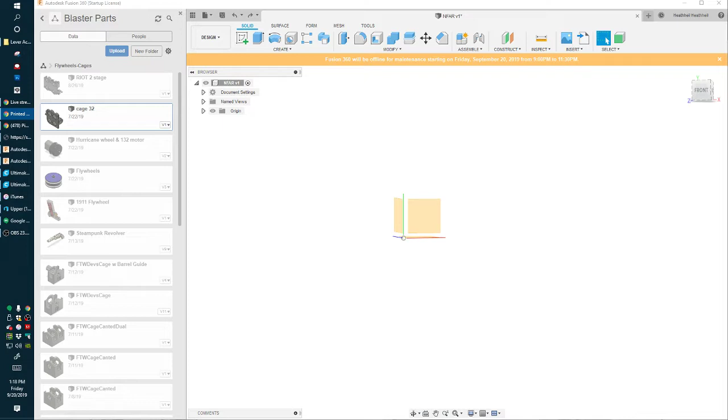So, I am going to make the no frills assault rifle, although it's going to have tons of frills by the time I'm done, probably. But I want to make something basic, simple.

Something kind of what Torukmakto calls it, the new dream rifle, and so I'm going to make one of those, but not like he would—I'm not nearly as good at that internal stuff.

Anyway, that's an intro. So welcome, Red Roy. Yeah, the people have the Sentinel if you can find one, but you can't—who can find a Sentinel? I sure can't, I haven't seen one. Actually, I have one, but it broke. I broke all of my Sentinels.

Anyway, so the start here. I'm hoping most people will watch this later because I'm just going to kind of treat it like I would treat one of my normal videos.

So the way that we start, and I'm using Fusion 360, some basic setup things—I've turned on the origin so we can line things up.

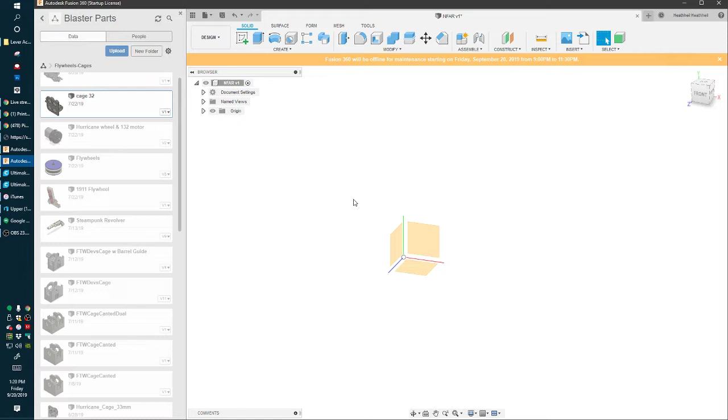I'll try to figure this out. Anybody who has questions, feel free to ask, I'll answer them as best as I can.

So there's some things that I set up. First, you have to save your thing, save everything into the same place so that you don't have to move them around to different projects. So all of mine are just a demo project because that's just where I started saving things.

And then, like I said, turn on the origin so you can see the center of everything. The first thing that I do, and you can actually change it in the settings, is I turn off the capture design history. I don't like doing that because, even though it gives you some really cool tools, it slows down my computer enough and it's made things complicated enough that I don't do that.

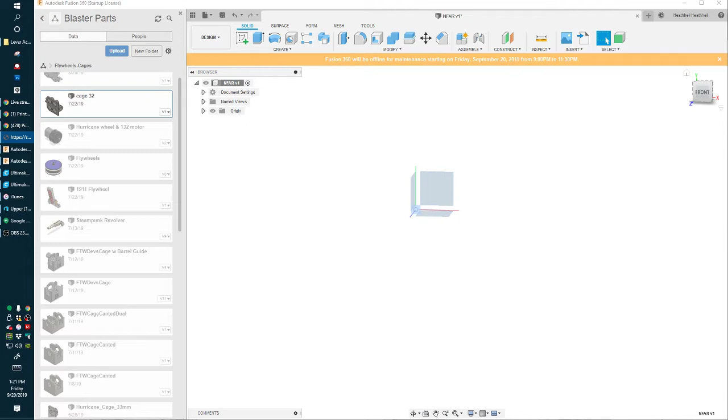Anyway, first thing that we do—I'm not exactly sure where other people are going to find these sorts of things, but that's just how it goes. There are open flywheel project cages that you can get in step format. I've got a nice collection of parts here.

Most of them are available in step form, I think, publicly. So what we're going to do is we're going to start by placing in our internals. I want something reasonably powerful, so I'm going to just build right away around a double hurricane cage, which will hit like 170 FPS.

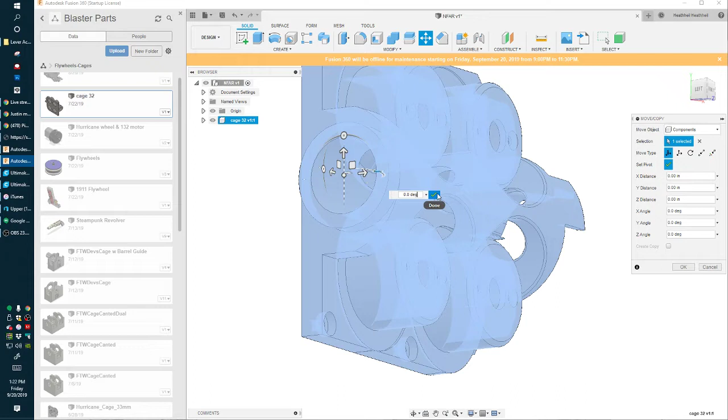The first thing that I'll do is we have the cage in. I'm going to grab the set pivot and I'm going to grab the center of the feed guide, and then I'm going to just drag that to the center of the origin. That way we know any shot, or the whole thing, is based off of where the dart is going to fly out, and that's the best way to do it.

So when we go to just the full view, this is dead center of where the wheels, when properly put on.

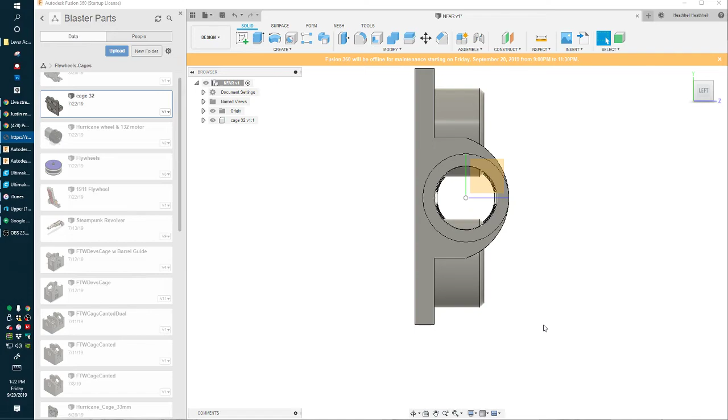So this is where I like to start. I usually place the cage first. The next thing that we will place—I'll get wheels probably eventually, but the next thing that I like to do is the mags.

Before I get too far, I have a picture of some concept art that I saw that I wanted to use for this. I just liked how it looked, so it's like, okay, we'll just use that as a basis.

So this is a handy tool to use, the canvas. If you're making a replica, which is what I'm doing here, we'll just grab that and line up the barrel, make it bigger than that. Okay, we will line up the barrel. I actually usually do this with the magazine, and we'll just kind of place the components here so that we have what we want, where we want it.

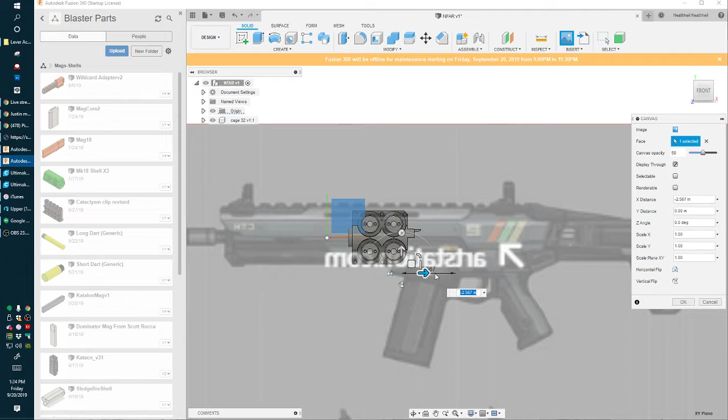But I wanted to have something here. We'll edit that later if we need to. I'm probably going to just use a full-length mag—I believe this is Captain Slug's 18-round magazine.

Which you can find with the Caliburn files.

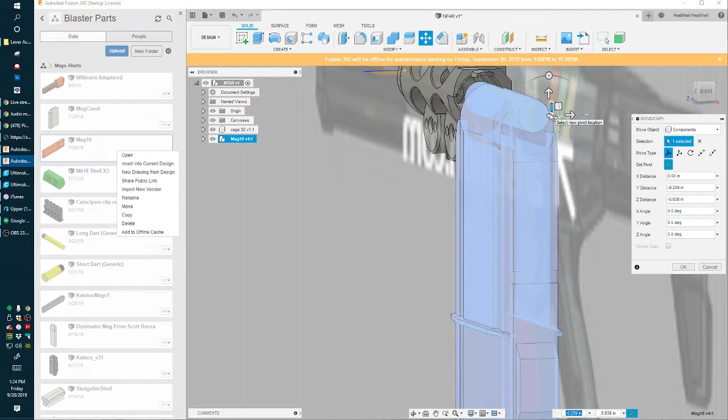Oh, okay. So I'm going to line up, this one has a dart mocked in, so we're going to just use that as our basis for checking.

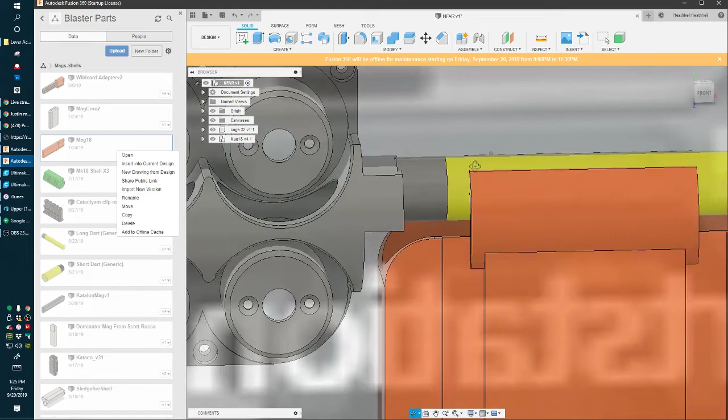That seems low. I'm going to just go like this. Even though there's a dart in there, mags are kind of hard because the lips kind of change the way it feeds, which is why we have the feed guides on the actual cages, so that this dart that's clearly too high, we can just kind of drag down, and then it can't go higher than the feed guide.

So anyway, I have to check my messages.

So we're placing the things. I like to put the mag and the flywheel cage as close as possible, just because then we can have shorter pushers and more reliability, all that. So we're going to butt that up right next to it. And we're like three-quarters of the way there.

So the last thing that we need to put in here is some sort of firing system and some switches. So I'm going to put in a solenoid because those are easy.

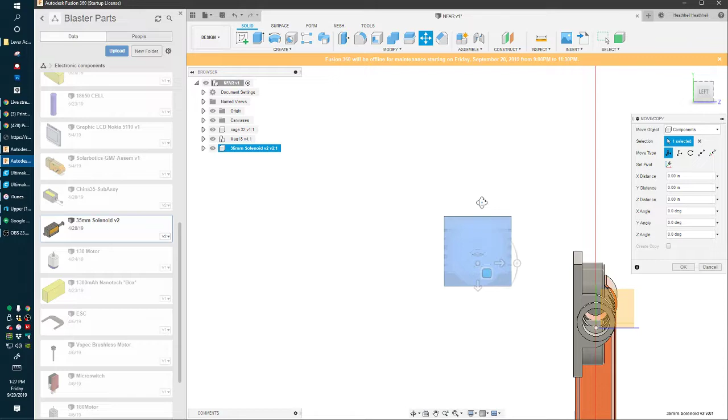Okay, so again, we're going to set the pivot right to the center of the pushing mechanism, if it'll line up right. There we go. It kind of latches or clicks onto the center of circles, which is really important to know how to do, but it's kind of frustrating that it doesn't always work out easily.

Yeah, that seems right. It doesn't seem right though. Oh, I see what I did. Okay, we're just gonna do that again.

Get it all? I think so. Maybe I did get it.

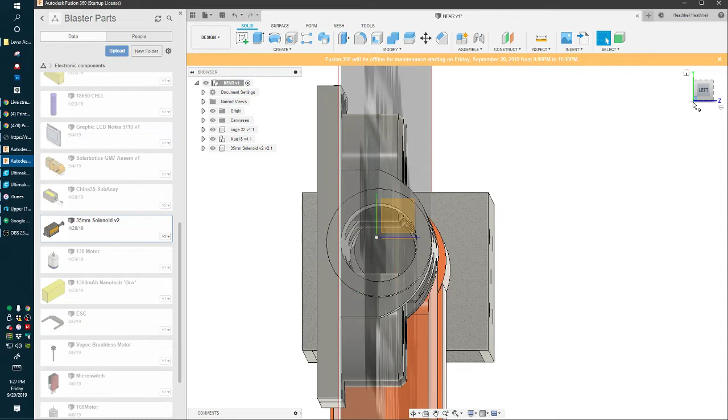Okay, so now that everything's all centered, we check the centeredness of things using the orthographic view, and just look at it, and if they look all concentric and nice and the same distance, then we should be good. So I'm actually going to save this right now because we have the start of something, and I don't want to lose my progress.

So I'm going to look up really quick because I can never remember this, how long a 130 motor is.

Let's see. 130 motors are... that's not helping me.

Come on. I wanna look at the fucking... Man, Google Images, he's on the shit.

Alright, it says, according to this image, that a 130 motor is 38.75 millimeters. So we'll just set that up.

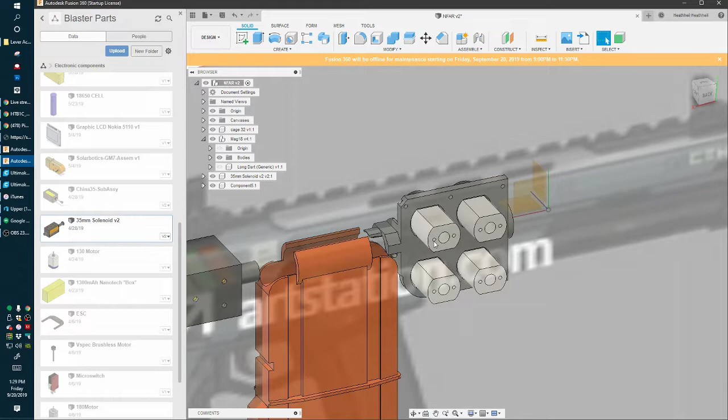Yes? Oh my gosh. Dom, are you okay? Oh yeah, Ellie? Dom, stop choking yourself, boy.

Alright, I'm going to assume that's right. This includes the tabs for length, so that's our full length that we'll have to cover with like a motor cover.

Oh my gosh, Ellie, that's amazing.

So the list of things, I'm going to actually write it, that we'll need to make this work from here will be a trigger, switches, mag release, and mounting.

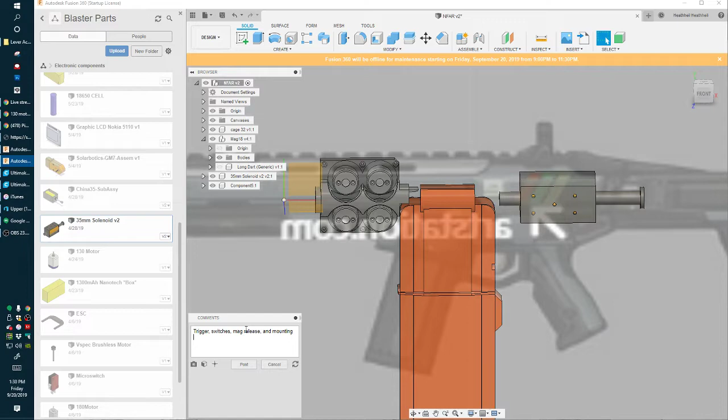Now that we've got the basic components all thrown in, we'll want to tweak. I want to take the solenoid and move it a little closer to maximize the push length that we get so that we get the most reliability and feeding.

I will probably eventually make this thing set up for my long throw pusher for 2-round burst because I really like that, but I honestly, even though I really like my bullpup, I'm not sure that I love the bullpup configuration. Anyway, so I guess we'll start here with making some shell.

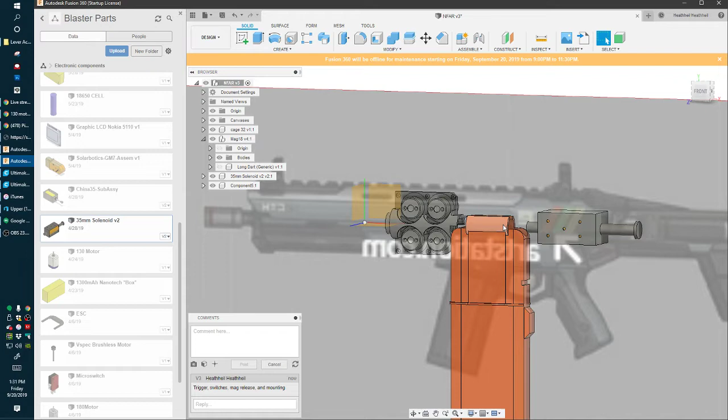So the quickest and easiest way to me to do this is going to be, let's start with like a lower receiver.

Ideally, what I want to do here is I want to make this have an upper and lower that can come apart. So I'm going to build with that in mind.

Also, we need to have a stopper for the mag, which means we need to come down. This whole design is clearly bigger than I've got it. As I mentioned, I'm going to have to adjust that, I'll get back to it. I did mention at the start that I might have to adjust my reference to fit better.

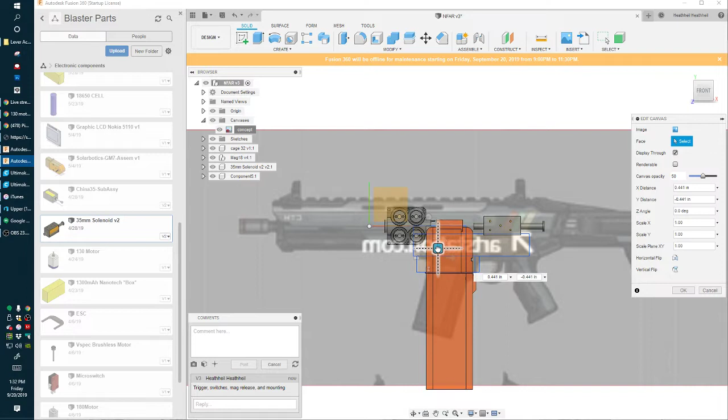We'll just do that. When I'm doing that, I usually like to use the magazine to match the length, because then it gives you the same, if maybe larger, proportions. So what I'm going to do is mess with that, because I want to see how far that is. 2 inches, okay. I really like the proportions of this design and the look of it, but the proportions aren't necessarily what I'm after.

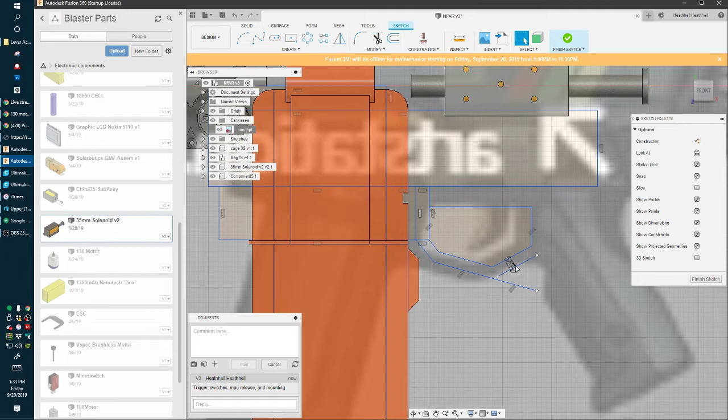So I'm just sketching out the whole thing here, and I don't want to go over the tools I'm using too much, but essentially I use the line tool a lot, offset gets used often, and a few others.

I'm also not going to take this reference to heart as far as ergonomics, because I've seen a lot of really cool concept art, and when you really look at it and think about it, it would be terribly uncomfortable to use in person. Like, just utterly. A lot of the time in games, they'll make the stock too short, so you'd choke up on it and be really uncomfortable. I don't want to do anything like that.

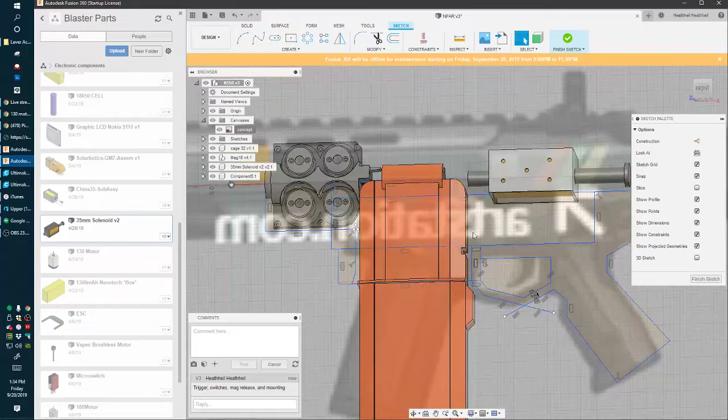We'll also see how we can make this thing work for wheels, eventually I'm going to have to add some for sure. So, we have a basic shape drawn out that hopefully you can see. After we extrude this, I'm going to make the concept a little lighter. So we have a basic shape here, and that's our basis.

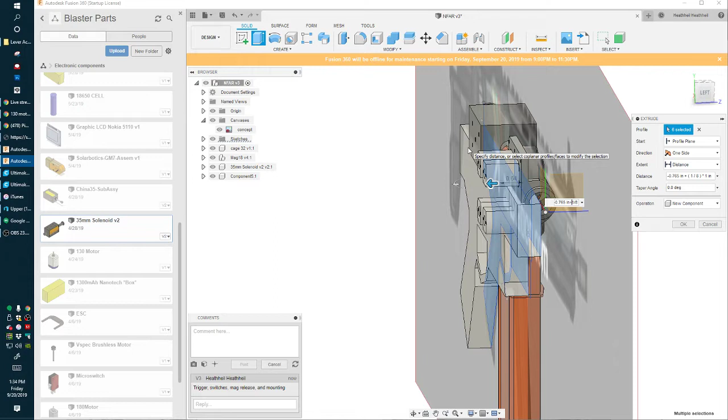That's our first part. So we go over here and do new component. We just drag it as wide as we want it to be. Usually we're going to want to cover the solenoid's width so it can be mounted internally. So I'll click to the edge of that, and it locks to that length automatically. Then I'll do some math here: we're going to do 1/8, plus 1/8 more, so we have a whole 1/8 of an inch of total length grabbing the solenoid. That'll be a nice solid wall when printed.

So we have a basic kind of setup here. Just looking at it, this looks too low to me. So what I'm going to do, and I might just keep it this way actually, is grab this whole lower section and split it. We're going to split the body with these two lines, or not - okay, we're going to trim that, and then split the body because it wants to have a single piece. This gives us a separate body that we can move independently, and that's what I want, because I want to choke this up a little higher so it's sleeker.

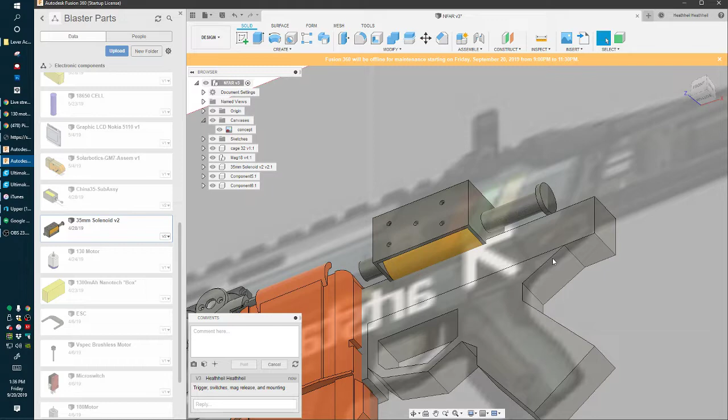I'm going to just move this face up higher all the way, and I might keep this as a separate component, both for printability - you can print the handle nice and simple - but also because it gives people places to change colors and stuff, which is always nice.

All right, let's take off these things. I want to look at my concept. So it's got this nice shape up, which I wouldn't think to do, so I want that. I have that a little bit - let's emphasize it, let's give it an angle.

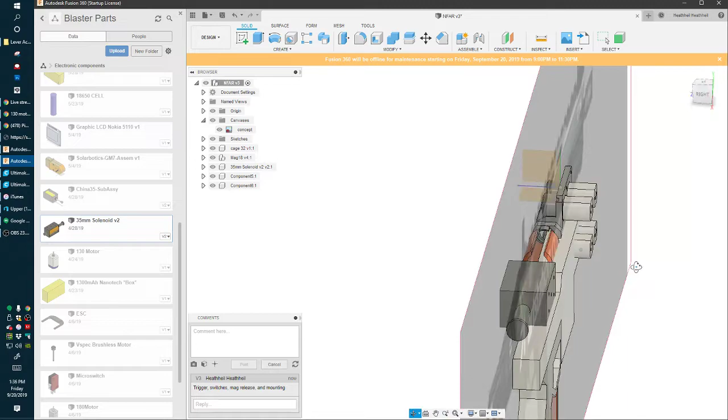A lot of what I do is kind of akin to sculpting. We make a big shape and then trim and cut and modify it down to the shape that we want. So I'll start doing a little of that, in fact.

One of the ways I'll do that is, we have this component here, we can grab it, extrude and cut the outline of it into the shape. And then to keep it from cutting that part permanently, we just turn it off, and then it's gone. Now we have this spot where it was cut into this body without any fuss.

Then we'll just add some tolerances - we'll cut off a quarter of a millimeter. Maybe we should go a little higher. Minus... yeah, oh wait, I did 0.025.

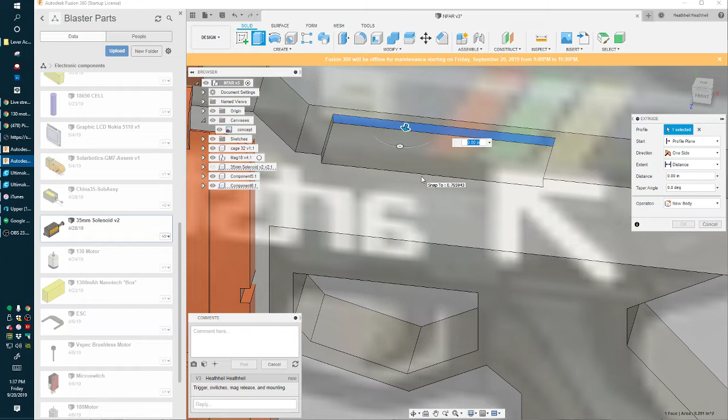So we'll just cut a little around it so that it's got some space. You want to always do that with parts. It's just a very particular skill that takes a long time to learn, kind of.

Also, this is worth noting: the way I'm working on this right now is I'm only doing half the right side of the blaster, and I'm going to keep doing only half as long as I can, so that by the time I'm ready to mirror the part over, it's as refined and finished as it can be.

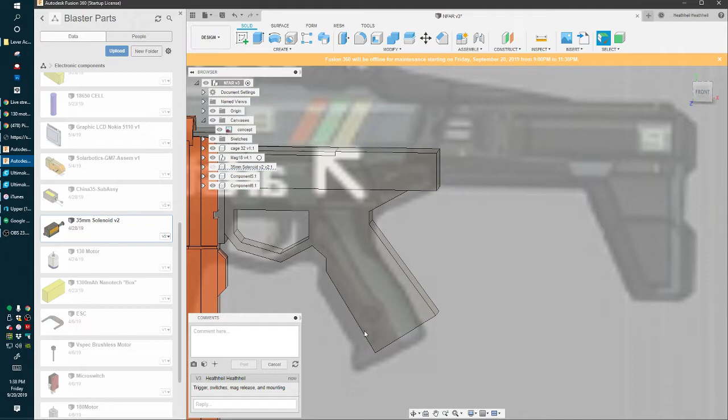That's how I like to do things, just because once you mirror it, any changes you make on one side often have to be made on the other, so you're going out of your way to make changes that are symmetric, when if you just waited to add the other part, the symmetry would be built in.

Oh, you know what I forgot we need is a battery. So we will insert that.

So with a flywheel blaster, we need the wheels, and with all of them, you need propulsion, the pusher, and if it's a flywheel, you need the mag and the trigger. In the case of flywheels, we also need a battery, so we're going to take this mock-up of a 1300 milliamp hour battery box, which should fit inside. Actually, that's way bigger than the battery would be.

And I know I've got battery mock-ups that I kind of want to use, but something's better than nothing, right?

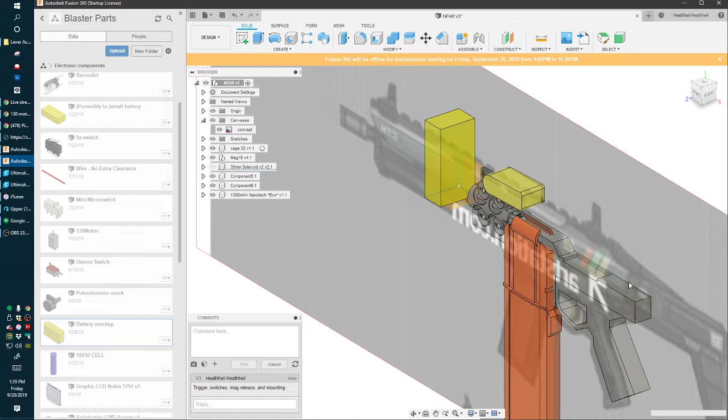Alistair, this is just—I'm making something because I've had a lot of people asking me how to make blasters and how to 3D model and stuff, so I thought I'd go through my process relatively quickly to show kind of the way that I approach these things.

Wait, that won't work. So this is just new, kind of—I'm doing something really simple and basic to go through the steps.

So I haven't decided on where I want the battery. I'll probably want it either here or in the stock back here. If it's in the stock, we can have a big battery, as big as we want. If it's down there, we could have a removable stock, which would be convenient for some people. I know some people like that. That's how they roll.

So, I don't know, I'm kind of torn. I'll probably decide on that later.

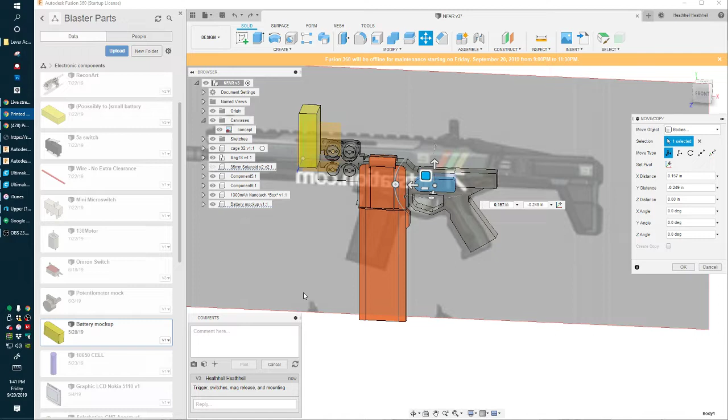Anyway, I'm just going to leave it where it is for now, because I kind of want to start. I need to get in a few of the other parts.

I'm going to go into my stuff. These mock-ups that I have access to are really nice, but my problem with them is they're a little too nice.

There we go. So I kind of like to use my own because they're just simple.

I should have music or something here. So I'm going to design this.

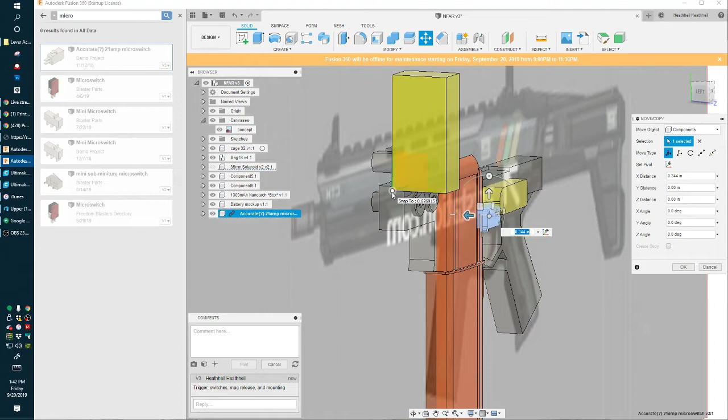Oh, also, whenever I finish this thing—so here's the problem with the battery here. I'm probably not going to do that. I don't like battery trays on the side like the Strife, but I'm not 100% ruling out something like that happening here. Or something.

Stock batteries are really nice, so that's a very good possibility. As I was going to say, this is going to be the kind of blaster that I make, and that means it's going to be to my standards. I don't like rev triggers and that sort of stuff, so, you know, tough luck.

So, you know, oh, oh, welcome.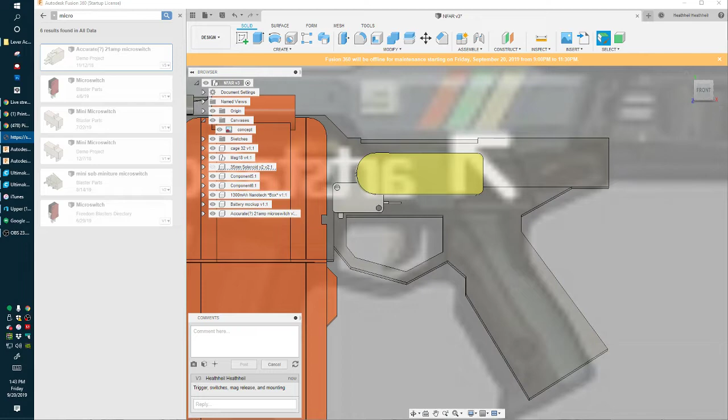Anyway, what was I getting at? So we'll make a trigger that probably presses two switches in a rotational way.

I think I'm going to tentatively place this in the back. The problem—I'd love to place it right where the solenoid is. Oh, that isn't close at all. Where is that? I'd really like to place it where the solenoid is, but that just doesn't always work out, obviously. Any pusher pretty much is going to make that hard unless it's a really low profile one.

And we could put the battery down under it, but that's not very convenient for bigger batteries, so.

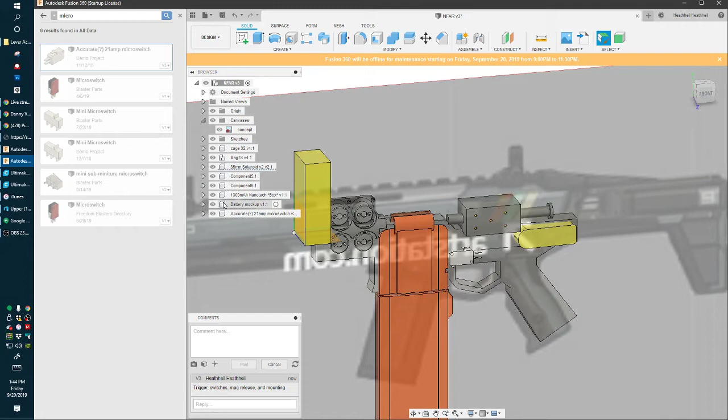Right now we just need everything mocked up so that we can get it all in its place. Where's that one? I don't want that one. Okay.

I guess we need a trigger. We actually need another one of these. But how? Could just put two like this.

Alright, so I'm going to make a trigger here.

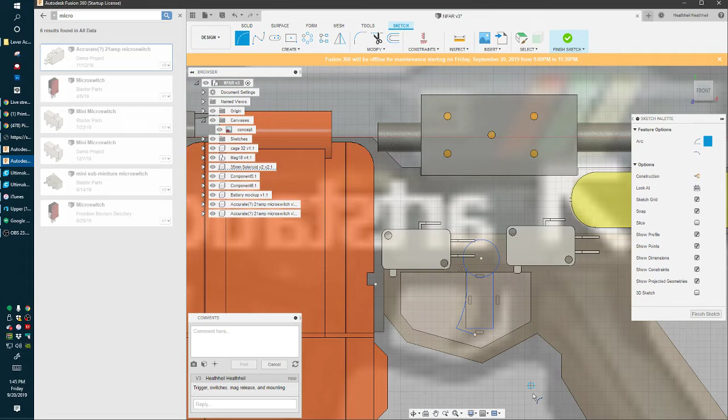As I mentioned earlier, there's a chance I'm going to throw my geared pusher in here. So if I do decide to do that, it's going to change the nature of this. And that's just going to be how it is.

Alright, so these guys, I'm going to put them up high in here, and make them independent, so that I can build out this trigger mechanism to have like a normally closed. I'll even just go simple, we'll do a 3-point rectangle from the center and go like this.

My macaroni. Sure, I'll take your macaroni, honey. But someone gets someone's fork. Well, that's okay. Can you clean me up? I will when I'm done here.

Look right here. Oh.

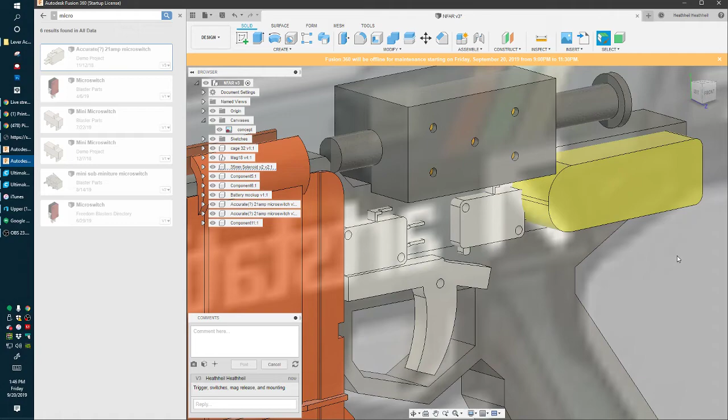I've kind of found that the sort of maximum length or width of a trigger should be about 0.2 or 0.5 inches. You don't want to go much bigger than that, so, you know. Anyway.

Some better holding.

Dom, what's up? Dom, you want down? You want down? Hey, why? Oh, that is what you were doing. You were messing with my rolls. Boy! Boy, you are! Say hi, Tracy. I know, I think it's time to meet you. Okay?

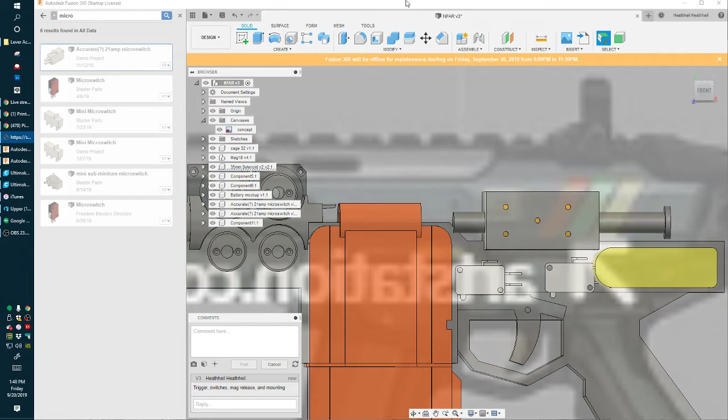I kind of want, ultimately, this to be able to have probably some kind of grenade launcher or something on it. So the way that this trigger is going to work is it's going to pivot.

And when it starts pivoting, it'll unclick the first one, and then at a full pull, it should hit the second one. Toying with the component and its projected movement, this switch in the back is way too high, and is going to have to be both angled and moved down. I want enough travel that I have some time before it hits, but not so much that the front is coming down too far.

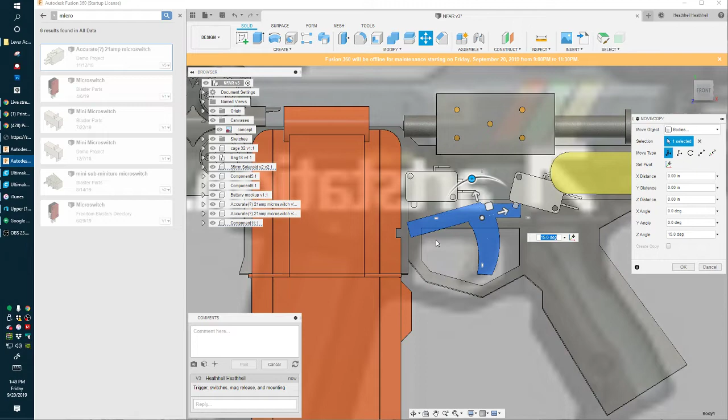Yes, Dom? So I'm gonna... Dominic. I'm gonna move this one back too, though, because we need a mag release in here in the front as well. So we don't want to just take up all that space with the trigger.

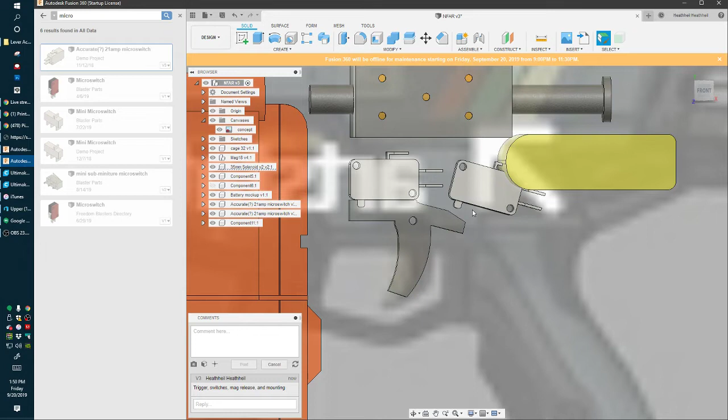So that works. 20 degrees is a pretty good trigger pull. Doesn't feel very long, but gives a lot of control over travel time. I'm going to move this one down a little bit more. Okay.

Just real quick, going to rename my components, because we really don't want to ignore that. Also, we're going to come in here and we're going to measure some things.

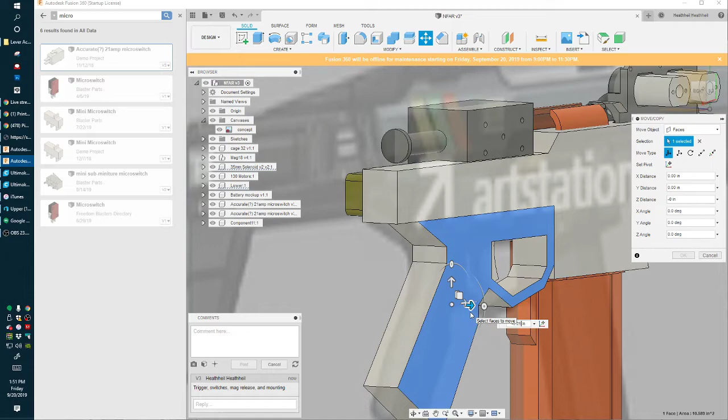So this handle part is too wide. 1.8 inches when it's mirrored is going to be way too big. So what we're going to do is cut it back probably about 1/4 of an inch, about to there, so that it's about 1/2 inch.

The whole thing will be about 1.25 inches wide when it's mirrored, which is a little bit large, but not terrible. That can always be adjusted, but a solid, chunky handle isn't a bad thing. Anyway, so

I guess we'll want to do a mag release too. The way that I usually like to do mag releases is just like a nice, simple pivoting thing, like the Raven. Of course, this is going to be impossible to hit with that choked up body.

So what that tells me is that what we really ought to do next is grab all of these components and stick them back, maybe like half an inch.

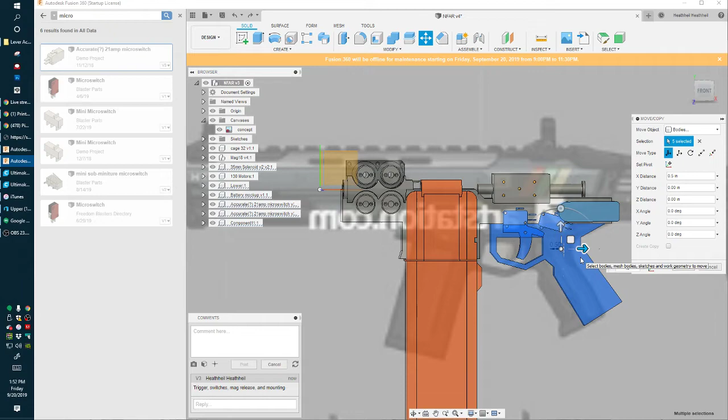Every time we do scoot that sort of thing back, we're making some new problems for ourselves. We'll be coming back, and that causes problems if, say, someone has a smaller printer and we need to.

Yeah, I know my mic is quiet. I can't do that much about it. As I mentioned at the beginning, my computer doesn't have a good setup for it. Let me see if I can adjust my volume. No, I can't. It's as loud as I can get it on my streaming thing, so I don't know what I did. I didn't do anything, I don't think.

Anyway, we'll worry about how to print this later. What did I just do?

So the organization of parts is really important, and I'm really bad at it, so I'll try to do better for this.

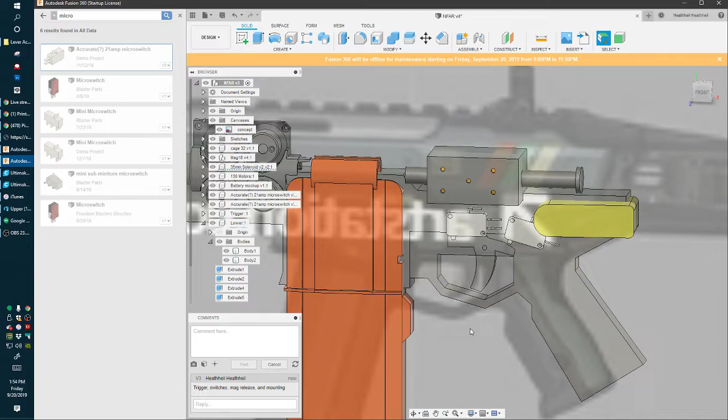It might have been, although the headphones never left my head, but I did get up to open the door for my dog. So maybe it was too far away. I don't know. Alrighty.

Gotta move that guy again.

We could, in theory, actually. Well, maybe that's not a bad idea. Depending on how tall we make the blaster and the size of battery, we could stick it right here above the mag. Let's do it.

So one of the things I do eventually hope to talk about is the ergonomics, because I can already tell looking at this it won't be super comfortable. It won't be terrible, but it won't be amazing either.

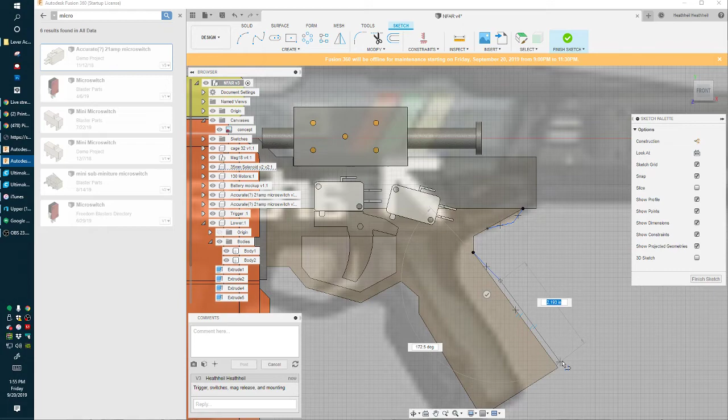So I'm going to add a little bit of shape to it. We'll want to round it out, of course, too.

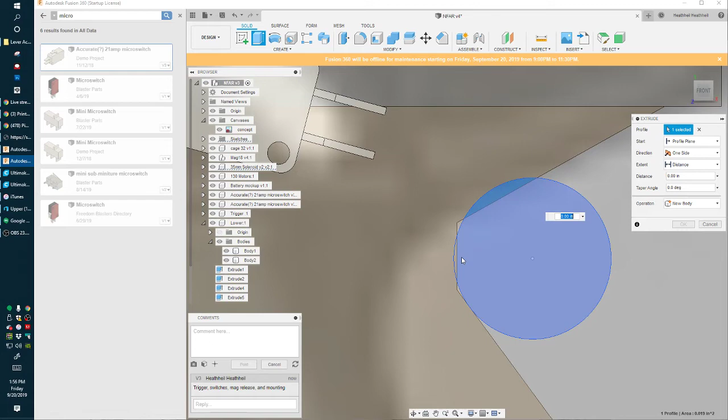So we'll take it, round it out. That's definitely too small. Just looking at it really quickly. I don't know how to measure this, what I'm trying to do here. Just cut a circle out.

When you aren't doing timeline, you can just delete faces and things, which is nice. That's not as doable if you keep the timeline on. But then if you keep the timeline on, you can also go back and edit sketches retroactively, and it'll change the extrusions and all that stuff. And that's kind of cool. But not really something I've played with. It mostly caused me grief. Ugh.

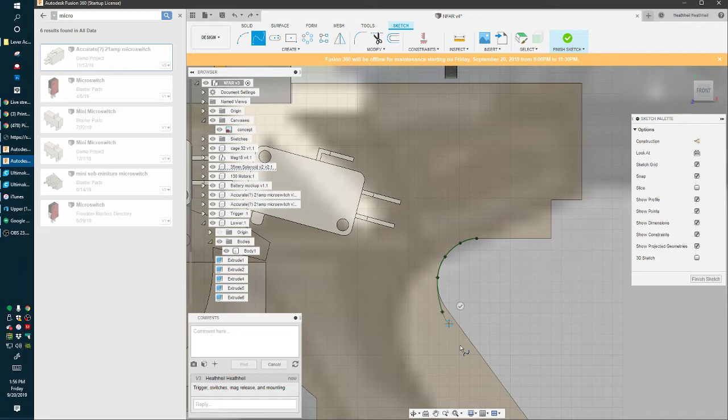Alright, we'll just do a spline here so that I can get the shape that I want. There we go. That, I don't know if that's better. It's probably not. What I'm probably going to do is, I'm actually just going to do all that.

The thing that I'll probably do eventually here is go and grab a photo of, like, a rifle that has good ergonomics, like a real one, put that in and copy the profile to an extent. You know, if it ain't broke, don't fix it. And the real steel firearms industry really knows their shit when it comes to that kind of stuff. And I think it's worth taking that into account when doing designs, that a lot of the problems that we need to solve have already been solved. And there's not really any reason to avoid using their solutions, in my opinion.

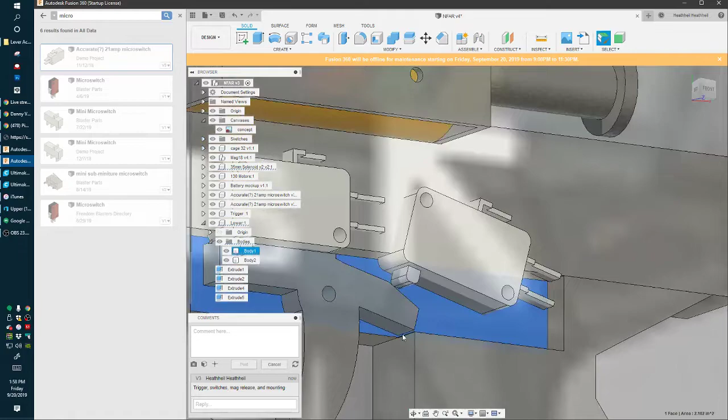So what I did just there is I just drew this rectangle and cut it away while turning off the parts that I didn't want to just delete, so that I could... no, that's not going to be fun.

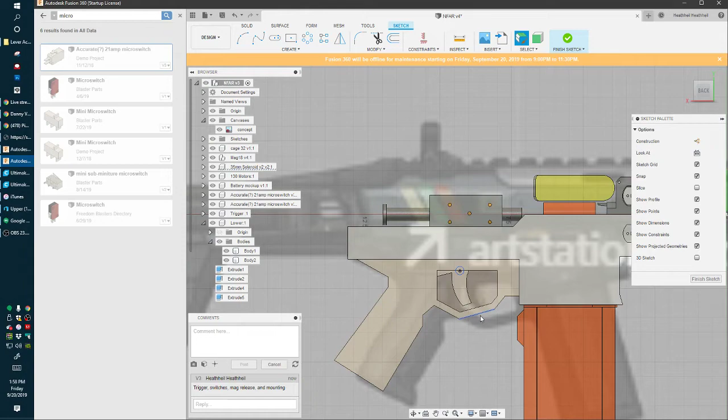So that we could have a movement or a track for this to move. Pretty simple, but you know, I'm just trying to go over everything here. So I'm also going to bring this all the way up so that we get the full trigger exposed, and then I'm going to draw in a little bit. We could also change the pivot of the trigger. I don't know, it doesn't look like this is going to be a comfortable trigger to pull, so we'll see.

Speaking of that, we'll just do that for here too in the front. Turn off the cage. I think this is one of the parts that people have asked me about, like how do you start making shells, kind of, and this is my answer.

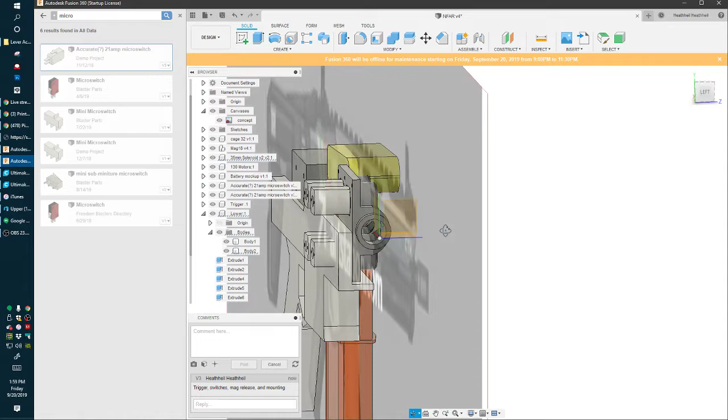So we'll just keep dragging this back, and that will cut away. So now we have an opening, like a ledge, kind of. So the cage, the motors won't fit yet, but the cage will fit. And I will probably change the cage itself to mount vertically, from the top down into the frame itself, because I find that that's really stable, and it makes it so that this entire assembly can be separate and we can have different uppers, or you can field strip it. In this case, you're almost going to have to field strip it because the battery is probably going to be up here. Not 100% sure about that yet.

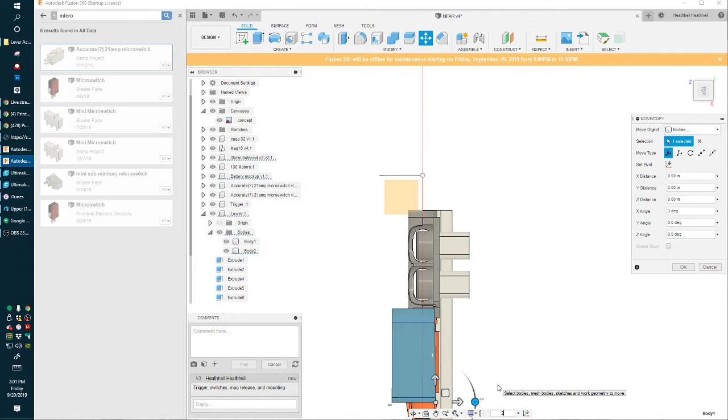Why is it angled? Oh, gross. Degrees? 5 degrees? No, 5 degrees? 2.9 degrees? 2 degrees? No. Uh-huh, good job, baby. Good job, Allie. Trying to figure out the angles of rotated parts is a pain in the butt. Whatever, that's good enough for me.

Oops. Now what we need to do is grab the center, if it'll let me, and then put it on the origin.

Some color. We'll do black and some pink.

So the other thing that we're going to need to do here... cut. Okay, we'll just chop that away. So this is totally open now.

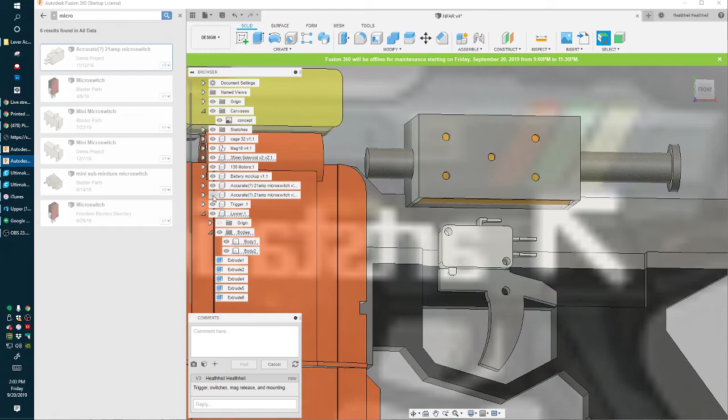What I'm probably going to do is, at some point I'll probably want to take a long, hard look at this thing for printability. But I'm not going to worry about that too much yet at this point. Because I may or may not keep these two parts chopped up, but I might just merge them too, depending on the printability, because sometimes that will make things easier and sometimes it won't. So, you know, who knows?

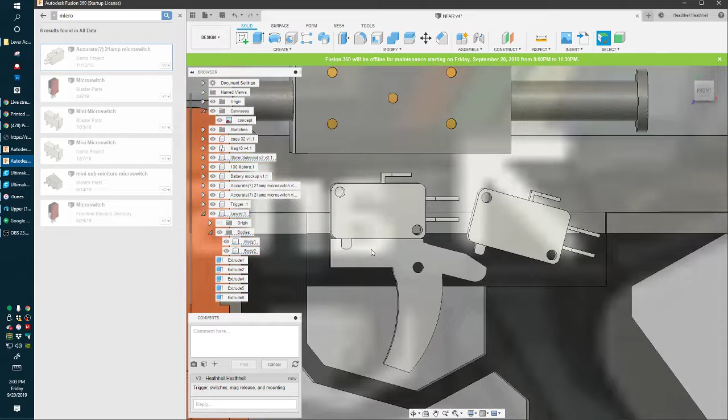I had no plans when I started this, so there's, oh god, you know what we need to do? We need a spring for this.

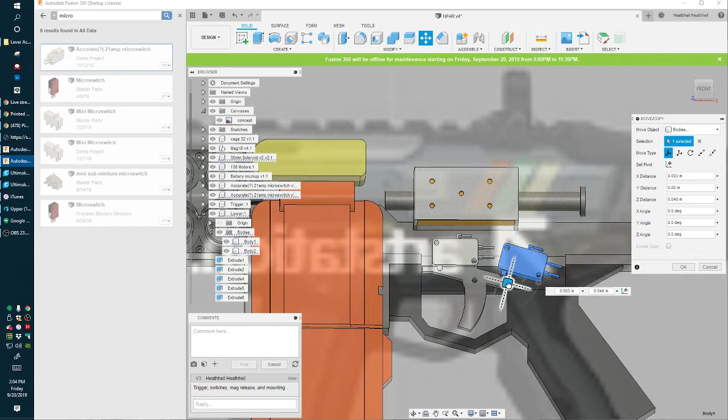I think what we'll probably want to do is some sort of extension spring holding from above on the trigger. Kind of, again, it's a little early to worry about. Well, it's not really too early to worry about that, but it's not my primary concern just yet. I want to kind of get the bulk of things sort of sorted. Who knows? I don't know what I'm doing, guys.

I think what I will do now is... maybe. Oops, that's the wrong place to cut. So I'm actually gonna make my magwell as well. Get it? And I'm gonna do that by cutting the... why aren't those connected? So I'm gonna cut the bottom of the mag off.

I don't know how. Allie, calm down.

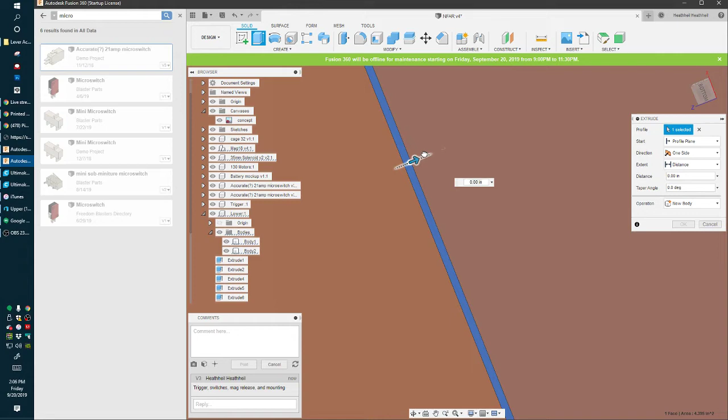Alright, I'm gonna have to do this a couple times, I think, because for some reason these parts aren't connected. Although, they might actually just be not connected. No, I don't get it. Oh, I see what it is. Sometimes you'll find parts that should be touching and they're not, like that. So I'm just gonna join this, and then we get this big solid shape.

I'm going to press O for offset, and we're going to do a chain selection, and do the whole thing at 0.5 millimeters. That's usually my Magwell tolerance. And we're going to grab this big thing, turn off the mag, and cut. And turn off the cage too, just to be sure.

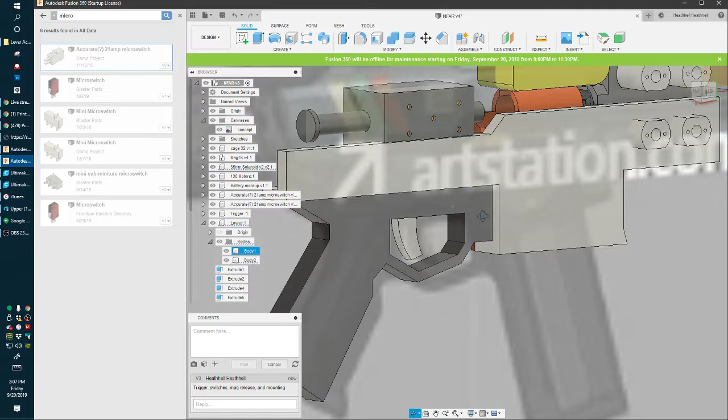So now we have a Magwell profile that will probably need to be tested. I have really bad luck with Magwells and their fit. It's really easy to get them too tight. So we'll want to check that for sure at some point, but not at this point. That will probably be like a prototyping test.

Back to what I actually wanted to do forever ago, which was the mag release. I'm just going to do a nice simple lever like the Raven. So we will put a pivot, we can get to that. We'll do like an 1/8 of an inch pivot. You don't even need to do that though. I have had plenty of successful mag releases that are a filament pin, which is 2 millimeters, more like a 1/16 of an inch.

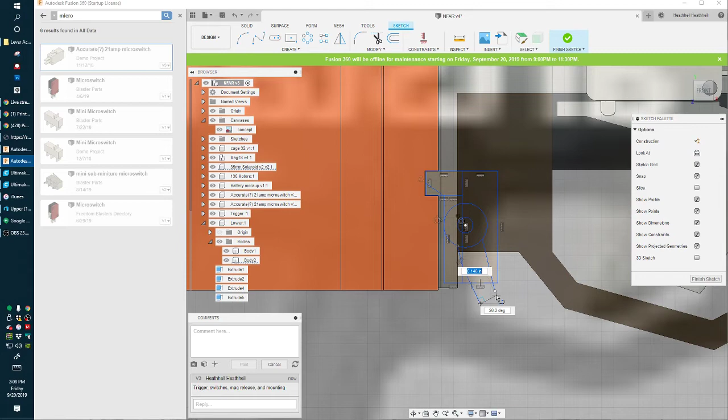So we'll just grab all of our edges, or faces, that we want to make our mag release. We'll do a new component, I guess an 1/8 of an inch, or not. We can do this as big as we want. I'll do 0.25, and make it half an inch wide.

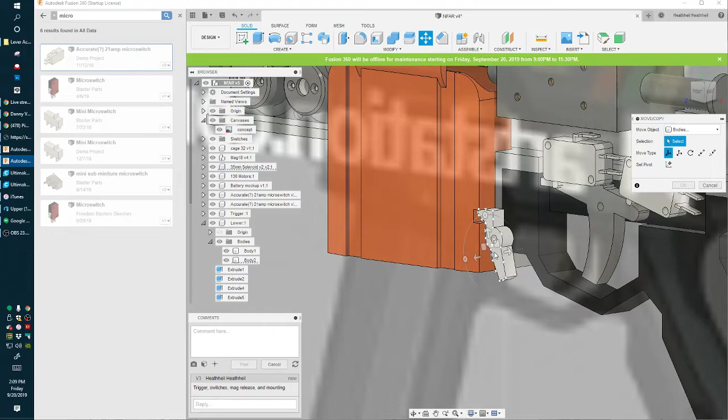Again, these parts, the trigger, the handle, the mag release, all of that, I will almost certainly eventually mirror. I just do everything in half first. That's a bit of a holdover from when I was doing clamshell designs, but it's also just a really handy way to make sure everything is set before you get too invested in details and then have to make edits, which sucks.

Do I like what? Yeah, I do. Alright, in theory that should work just fine. I might eventually look at like the Raven or something later.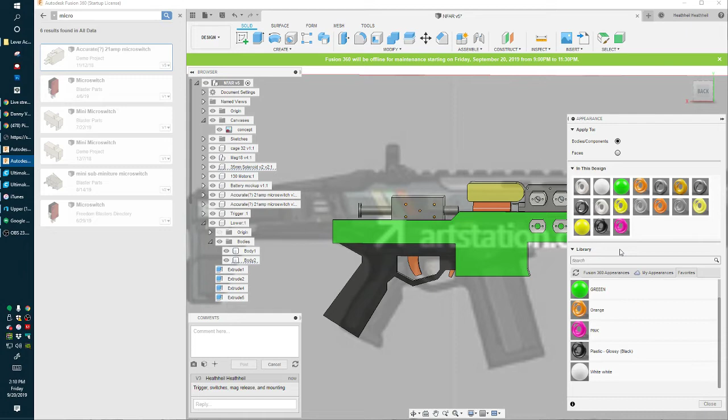So let's add some more colors, just because I like to denote things particularly. I always do triggers and buttons in orange. I usually do frames in black and like pink or green. I'll do green. Although I'd actually do both of these in black, because I like to have the lowers black and the uppers colorful. That's just a style thing.

Before I get too far into this, I do want to do some kind of chamfer here to see what the minimum width I can squeeze out of this is, because that will almost always dictate the comfort of the blaster and the space we have to work with.

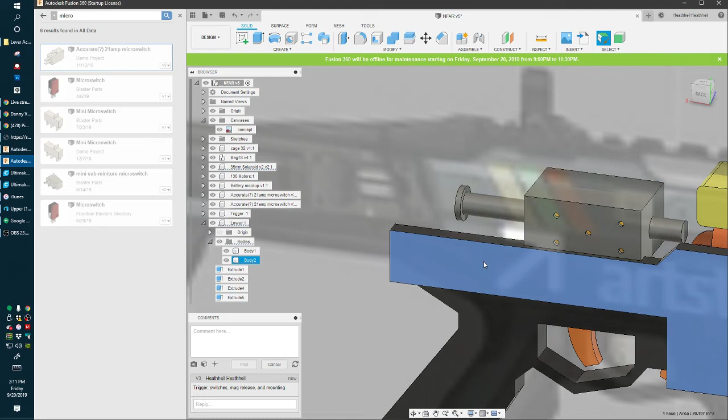I'm not sure where I'm going with this in terms of aesthetics, so I don't know where it's going to go or be. I guess what I'll do next, because I want some more fun on this, is make an upper receiver. I'm probably not going to go super in depth on the fun features here. I mean, I called it a no frills rifle for a reason. I have a lot of fun things with slide locks and all that sort of stuff, but I'm not really all that fussed about that kind of feature right at this moment.

So this concept looks like he's outside. Isn't that crazy? He's outside, Ellie. I don't know, he's outside. I told you. So this concept, I don't know, Ellie.

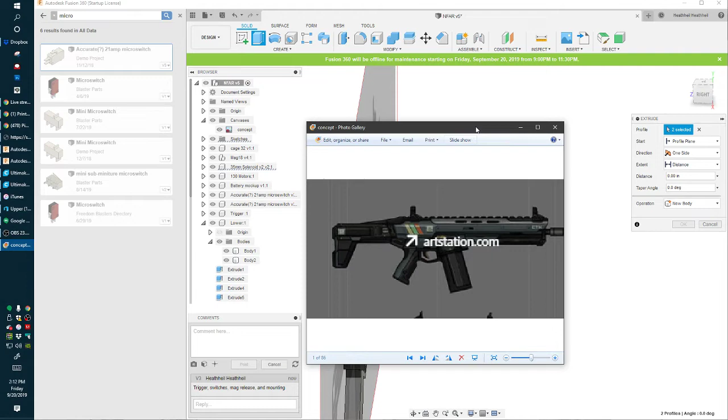He just is. So this concept looks like it's broken into many parts, in terms of upper and lower. We've got the black lower receiver here, what looks like possibly a shotgun pump grip, I have no idea, and then this mid section and an upper. That's kind of like how I did my MHP3. I'll pull up here, we have a lower, a mid, and an upper, and maybe we'll go for that.

MHR. You know what, I probably will actually.

Come on in, Dom. Come on. Bye, Dom. Okay, yeah, let's actually, you know what, let's do that.

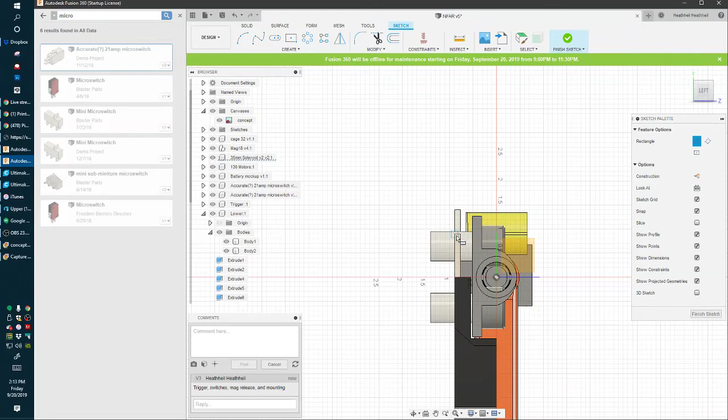I want to match the visual style of my MHP3 a little bit. So what I'm going to do is add this front section that goes over a bolt—we'll see if we add a bolt or not. Before I built a large shape and cut it down. Right now I'm probably going to take this small shape and build it up, but I'm not actually sure exactly where and how I want to do that.

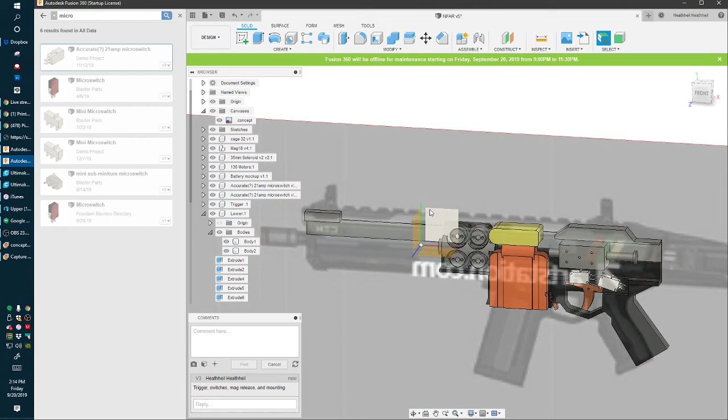For sure, we want this area to be wider so that we can add a bevel. We'll just go halfway. Actually, what I really think I'm going to do is take this, and do sort of the—wait, I don't need to go that low. I'm going to do a middle section, I think, so I can get a sense of the way these parts are put together.

You know, we could probably just add as many stages onto this as we could possibly want. Just add some green.

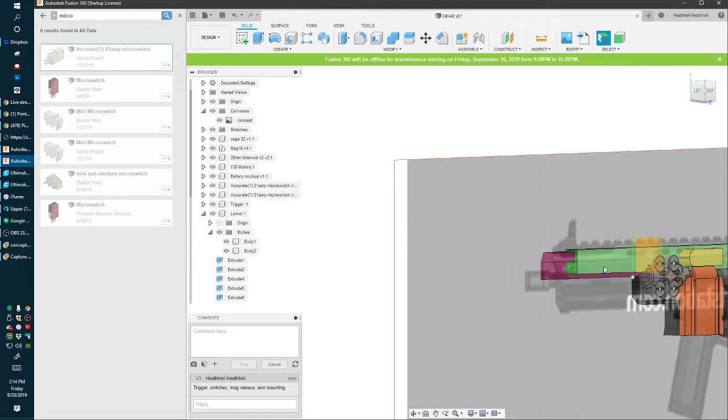So what I'm going to do here is take this part and put it here so we'd have a sort of lower hand guard on the bottom. I also don't want it to be this long, even though I like long, rifle-y type things. It really doesn't need to be. I want something semi-compactish, I guess.

Where did my chat go? There's probably no one watching.

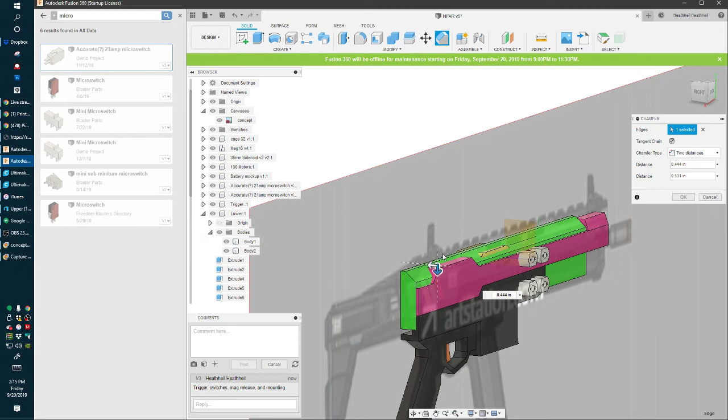Alright, we're going to take this and chamfer that in, because we don't have to worry about motors coming up that high. We do have to worry about the battery if we keep it there, though. I don't want to keep the battery there. What we could do is just cover the battery by going like that.

I'm going to bring the whole height up. We'll do that by grabbing all of the faces.

Oh, come on. I did not grab a body. Okay, Dom, let me—let go, Dom, I can't do it if you're touching it. There you go, Dom. No, I only grabbed the face.

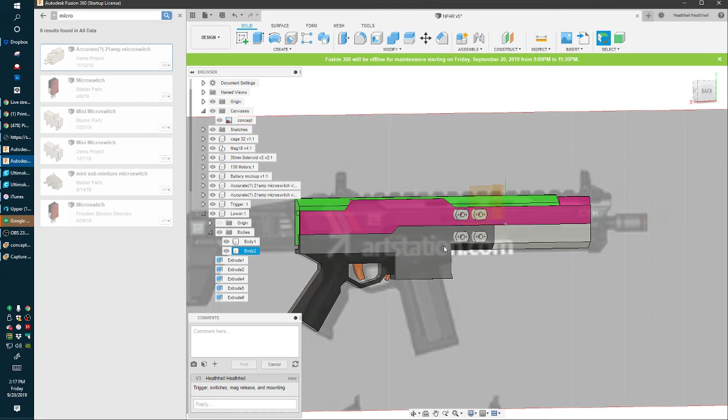Whoops, no, I didn't want to do this. Alright, so I'm just going to grab this face and do a new body, or a new component here. That'll be like the front handguard, that we may make swappable with some sort of grenade launcher someday.

Let's get my mag back in order too, just so we can see everything—where this is going and how it looks—and chop that down, because 18 mags are just too long. Nobody likes them. Well, I don't like them.

Alright, that looks pretty good. Let's see—I have not been taking measurements of length and stuff, so right now this is going to be about 3.5 inches tall and 18 inches long, plus stock, which will probably be another 12 inches. So we'll probably want to bring the front down even more.

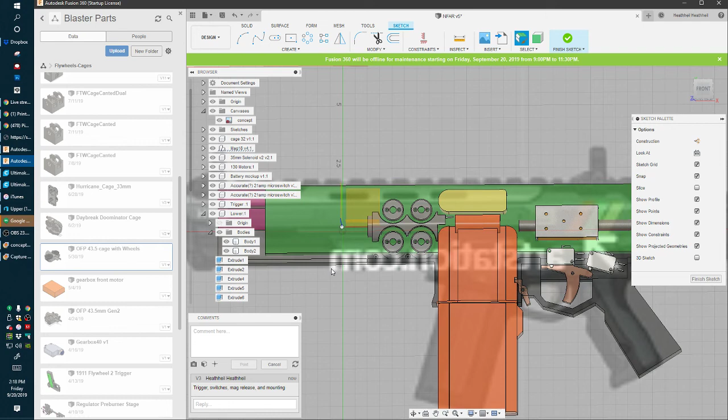If we were doing a full length or full size cage, which I can—I'll just throw one in for reference. I should do those, actually. So we would bring this bottom part down more, and probably the top up as well. That's usually how it goes.

So as we can see, the top wheel would be just barely contained here, and the bottom wheel would need some extra space around the bottom to account for it. That's not a big deal, just something to keep in mind.

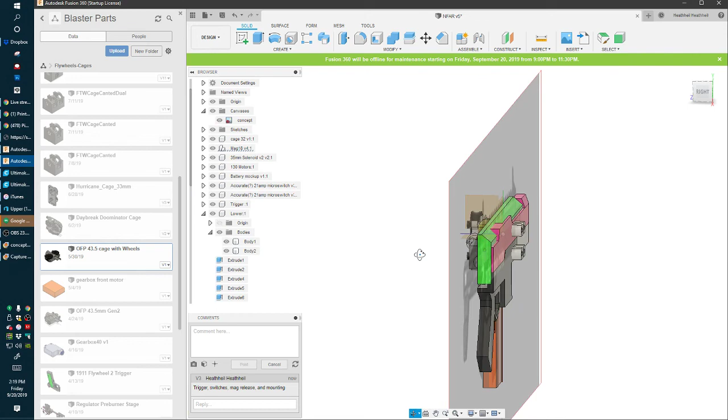You are welcome. I appreciate you guys watching, and hopefully somebody learned a little bit about it, because I really do have a lot of people who ask me how to do this stuff, and I want to be able to help people with this. I don't see any reason to hide knowledge, to not be open about it. If someone's got the will to do it, they'll find a way anyway. You may as well make it easier for them if they want to.

Exactly, for the people. But fuck the people. People suck.